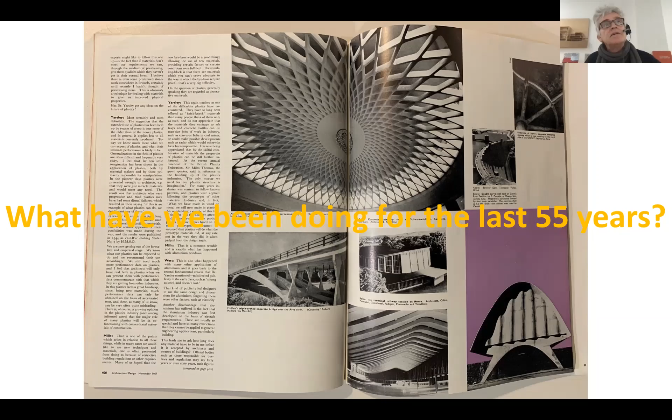But interestingly, I picked up a copy of an old architectural design magazine from a few years before then, and this had features on the construction of Corbusier's Unité d'Habitation in Berlin. It had really innovative examples of ferrocement concrete design. It had solar panels and solar shading devices, and adverts for laminated timber construction, including the crystalline hall as a government pavilion in an exhibition in Brussels. What have we been doing for the last 55 years?

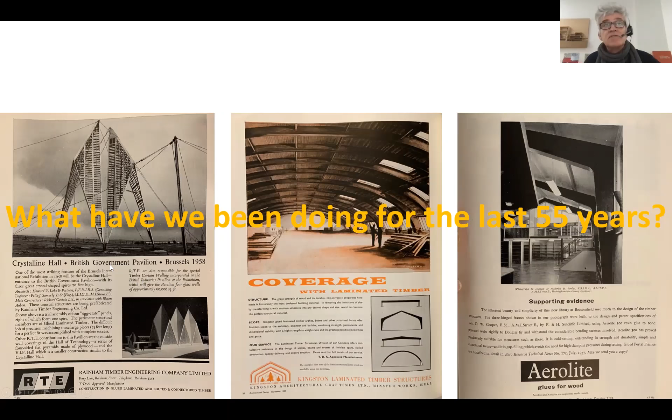Also an article in The Guardian which highlighted the issues around fossil fuel firms and their contribution to the problems of the climate emergency. It was in 1959 that a physicist first told the Petroleum Institute that a 10% increase in CO2 will be sufficient to melt the ice cap and submerge New York. I think this chemical contamination is more serious than most people tend to believe. Since then, there have been various alerts of the impacts on the climate.

In 1992, the Rio Earth Summit got some world agreement to what we had to do. 1998, unfortunately, the US refused to ratify the Kyoto Agreement. And even last year, members of OPEC were claiming that climate campaigners are the biggest threat to the industry, and claims that they're misleading the public with unscientific warnings about global warming.

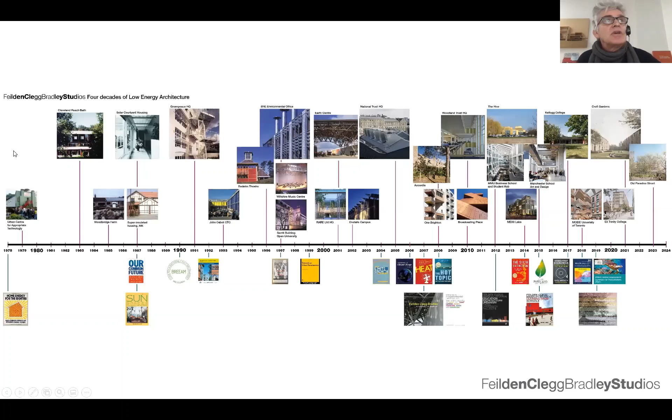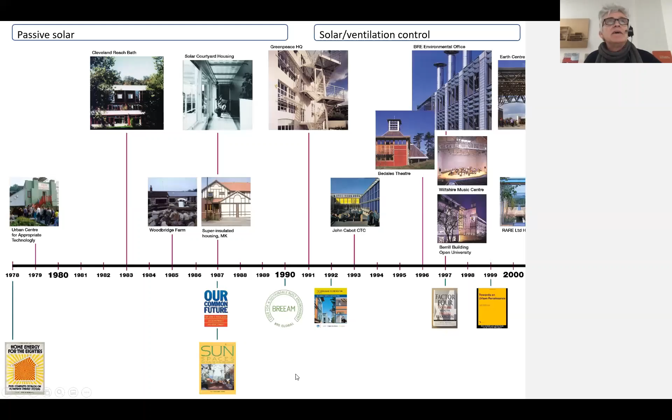Feilden Clegg Bradley Studios have been working for 40 years in the area of low energy architecture. So in '78, the firm started looking at passive solar design and community energy projects, developing significant improvements in how to work with the design team to reduce operational energy. And then after 2000, working holistically in housing, school design and workplace design to reduce energy consumption, and now looking at embodied carbon and passive house standards of design.

What has changed though in the 55 years is that the public now also realize there's a problem, not just individual scientists. And the UK Architects Declare, which has now got hundreds of signatures and also groups around the world, advocated 11 issues that architects should pursue in order to work towards this issue.

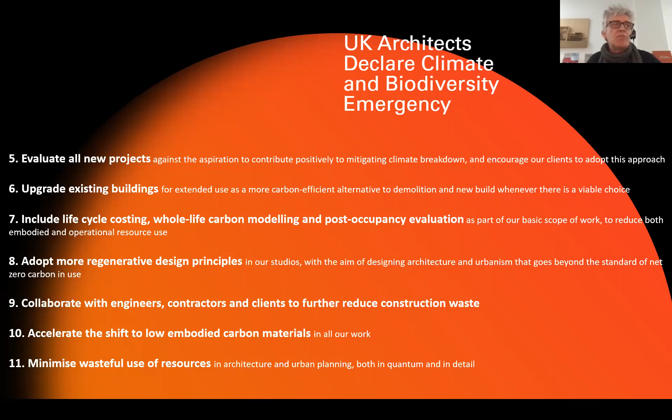Raising awareness, advocating faster change, establishing mitigation principles, sharing knowledge, evaluating all projects against issues, upgrading existing buildings, including life cycle costing, regenerative design, collaborating across the industry, accelerating the shift to low embodied carbon materials, and minimizing wasteful use of resources. And so I want to just cover 4 issues that I think architects need to address. We need to commit, we need to prepare, we have to act, and then we have to share.

Committing is the first thing. We need to recognize the issues and align our values and commit to act and understand and measure impacts. There's really useful work that's been done for more than a decade now on global footprinting. The world currently only has 1.7 global hectares per person on the planet. And different countries have different access to resources and also consume more than their country can supply.

So in the UK, we have a global footprint of 4.2 when the world can only support 1.7. In the UK, we only have 1.1 of resource in our country when we need 1.7. And overall, we're in the red category of needing almost 3 planets of resources to support our lifestyle. And energy, transport, food, goods, services, and infrastructure all contribute to this impact.

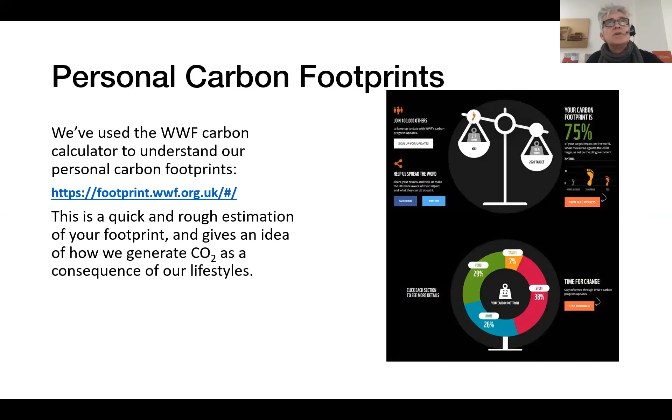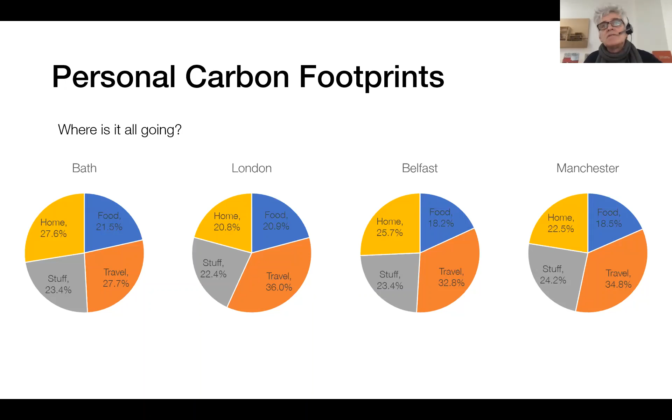So firstly, last year, we all looked at our own individual carbon footprints. The World Wide Fund for Nature has a good tool. And across all our offices, we worked out what our impacts were. We were trying to target 10.5, and we ranged between 10.8 and 13.4. It's split in quadrants, really, between food, travel, our stuff, and our home.

And we've also done this to look at the impact of our practice. And this last year, which is up to April this year, so this is before the pandemic, we are lower than we've ever been at 0.8 tons per person. Compared, you see, in 2006, when we were double that impact per person. So our office operations are getting better.

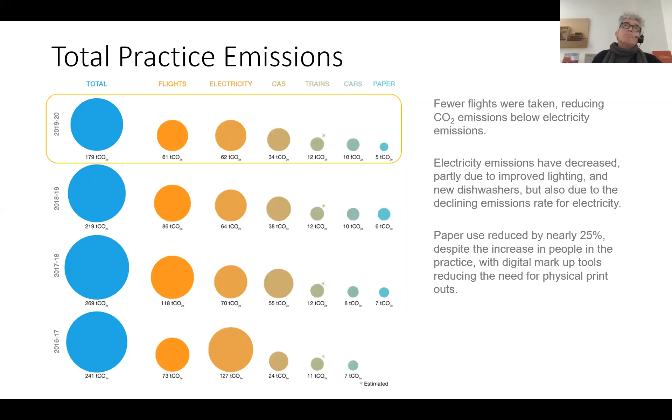We also looked at things like waste in our operations. We're not recycling what we should. And we looked at our food. We have a chef in each of our offices, and now we're going to vegetarian and vegan food, having significant benefits in our carbon impacts.

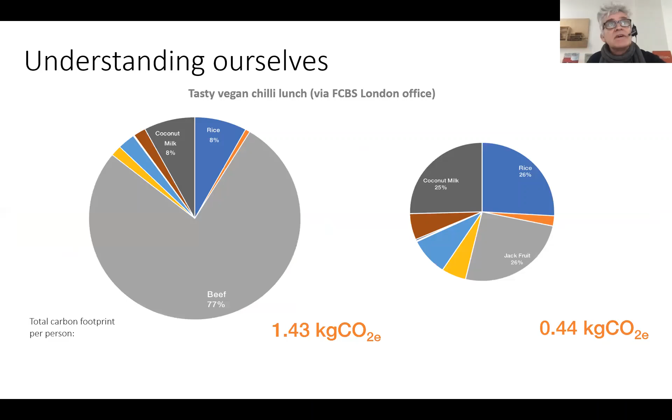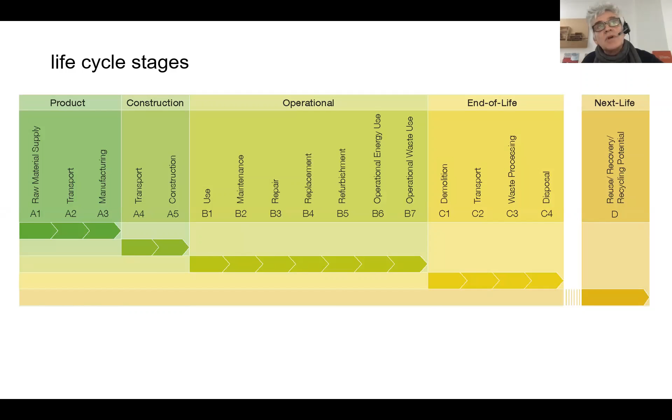So as we try and understand our impacts, we need to communicate this to our staff, we need to train, and we need to update our systems and our approach. So we've set out a 10-year plan, and most of this has to be done in the next 5 years if we're to try to get to net zero carbon in our projects by 2030.

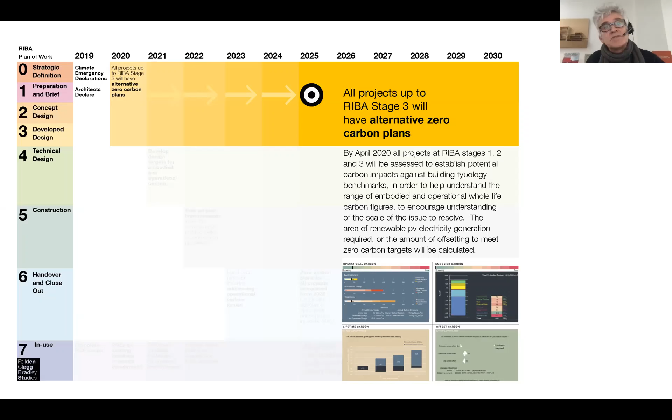First of all, we're setting up methods to understand what the carbon impacts are. We're working on One Planet Living action plans for each of our projects. And we're collecting information on how well our projects perform in use so that that can influence our benchmarking.

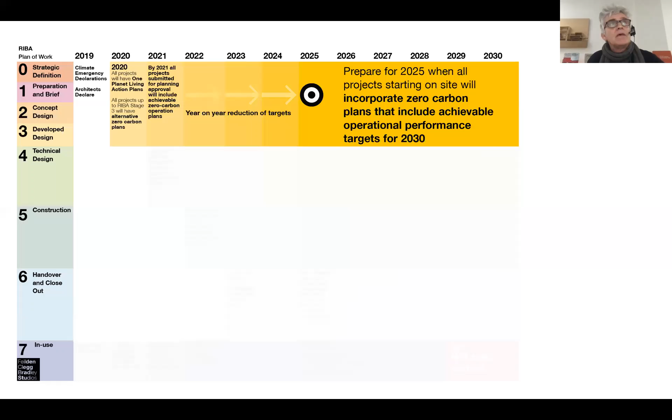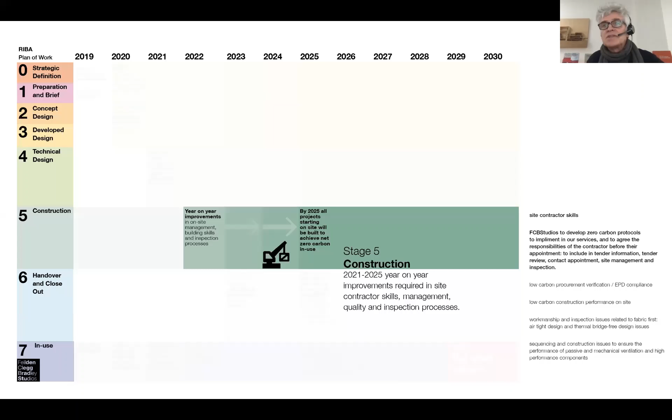We're then targeting year-on-year improvements, working out that by 2022, we have to detail and specify for net zero operational carbon, so that by 2025, all projects starting on site should be capable of operating at net zero. There's lots of skills that have to develop in the industry to achieve this. And after handover, we need to make sure that we help clients actually achieve this in operation through in-use monitoring and post-occupancy evaluation.

There are various tools and a lot of information now available on the web. There's a fantastic project called Project Drawdown, which I recommend you look at to try and see the scale of the benefits that could be possible if we fund them. And the UN Sustainable Development Goals and the 10 One Planet Living principles are really useful in helping frame the discussion with clients.

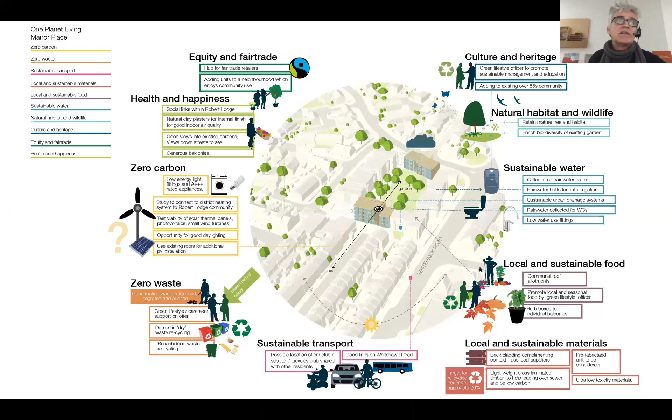Using the One Planet Living principles, we can help define at the early stages of a project which items we want to focus on and which might be achievable within the funding that is available. We set up understanding of our carbon impacts, both targets for operational carbon and targets for embodied carbon. And we use the information from the great guidance from LETI and soft landings protocols to guide how we act through the design stages and operation of our buildings.

And Ashley will cover some of these in his talk, but post-occupancy understanding is important, and the IEDE has done a lot of work in this. But we've got to realize how little time there is before 2030. So if we're briefing a project now, it might open in 2024. If we do a POE, we'll need at least 2 years to get information before we start the briefing of another job that would open in 2030. We're running out of time. We have to act immediately.

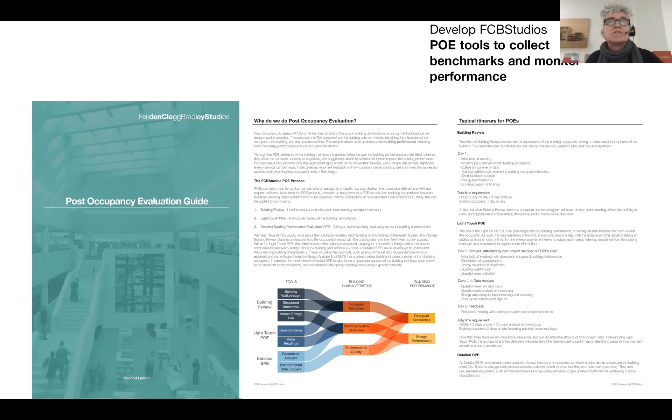So we've got protocols set up for how we should achieve this and different levels of feedback, which we discuss with clients. We then have to act. We have to communicate and agree with clients how we can work, define responsibilities, align the project team, and construct and monitor the projects. First of all, we should always look at renovation before new build.

For example, we've recently renovated the Hayward Gallery in central London and the Queen Elizabeth Hall. Alexandra Palace in London, another building that we've recently renovated. And in schools, looking at how existing buildings could be repurposed for schools, perhaps thinking about that before building new ones to reduce embodied carbon impacts.

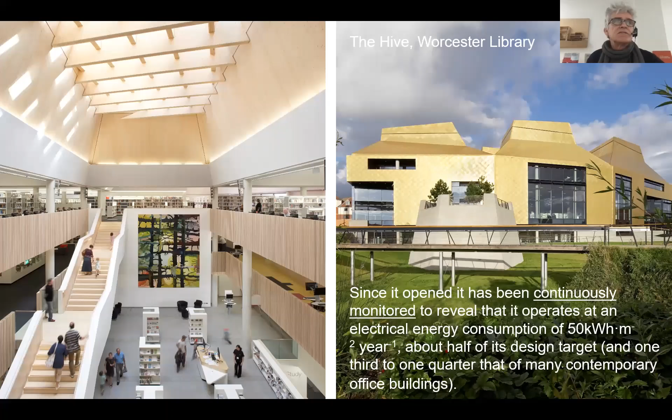And then in post-occupancy evaluation, as we have at the Hive in Worcester Library, monitoring it continuously and actually proving that you can have operation in use which is significantly better than the design targets set. By all this data collection, we then hope to be able to share this information and use it to help in design of future buildings.

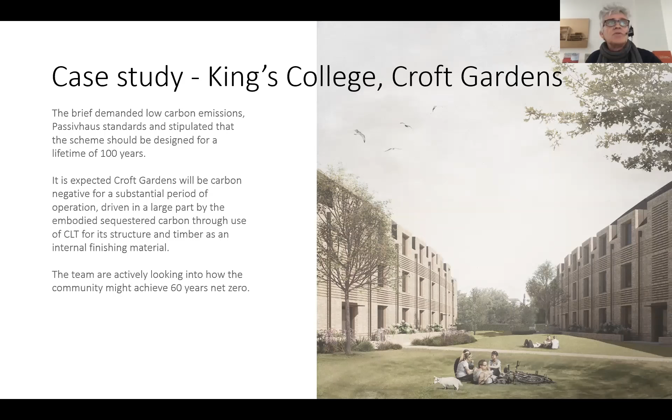One project we're working on at the moment for King's College in Cambridge is a brief that demanded low carbon emissions, passive house standards, and a scheme that could have a lifetime of 100 years. So we've looked firstly at the embodied carbon of the construction, and we're probably in the situation as the second of these graphs, where we start off with a carbon negative structure, but potentially over time, the operation will have carbon impacts.

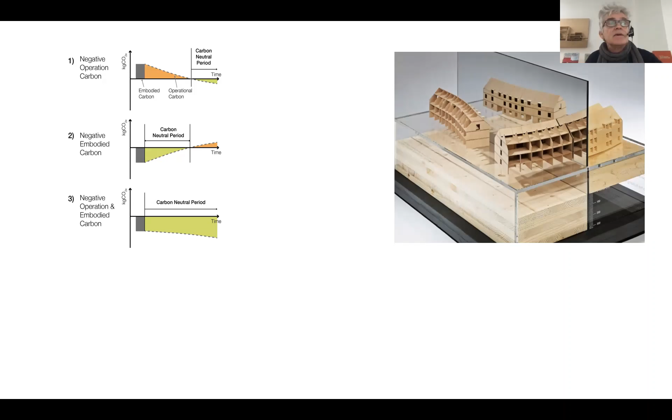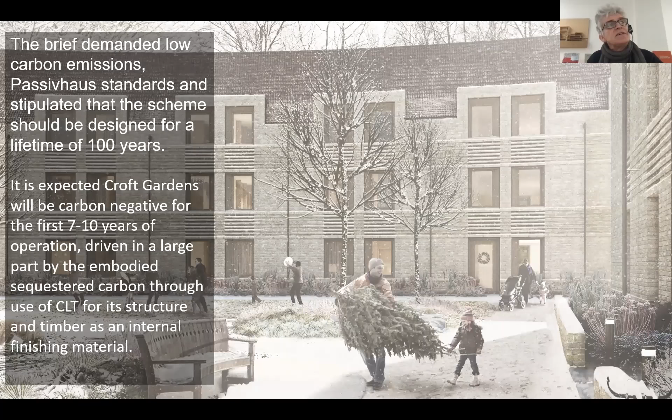But the ideal that we're looking for, and which may be possible, is to have a negative operational and embodied carbon throughout the lifetime of the building. So we're looking very closely at the airtightness, the specification of all the materials. And we're proving at the moment that for the first 10 years, we will be carbon negative. And through the later design stages and the use of more tools, including FCB carbon, we're looking to see if we can actually have a route to complete zero carbon in use of this building, operational and embodied.

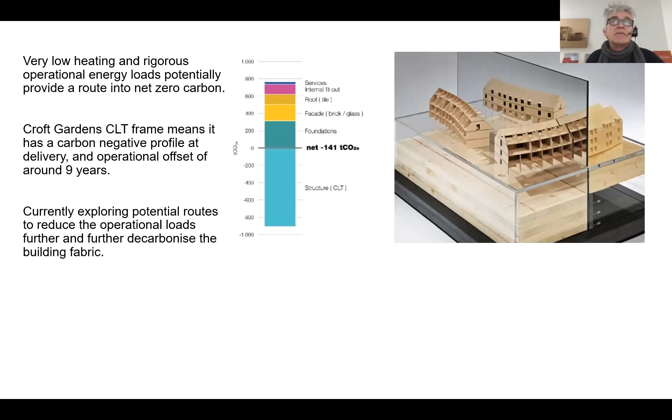We then need to share information. We need to share knowledge, celebrate success, and lobby for change. And this is why engagement with UCL and UCL's engagement with the industry is so important.

Our own publications are things that we've used to try and share our design approach. The book called The Environmental Handbook, which is now out of print. There is a website called The Environmental Handbook, and we've just recently got funding for a knowledge transfer partnership with UCL to try and do an update of this information. And we're running two PhDs, one on international climate design and one on climate emergency and university buildings.

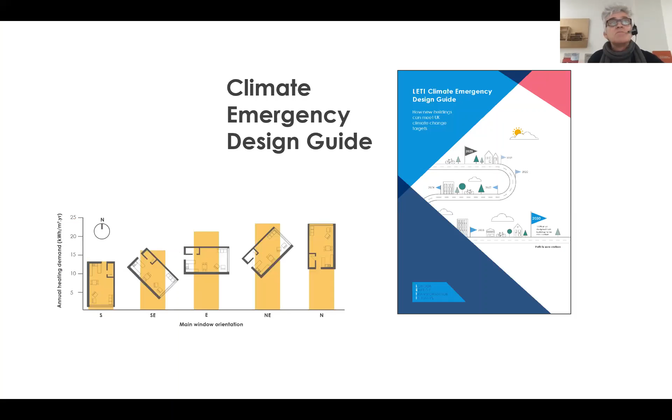Our involvement with the LETI design guide and the cross-industry collaboration is really important to set benchmarks and to lobby for change with government. Building less, building light, building wise, building low carbon, build for the future and build collaboratively being the underlying themes

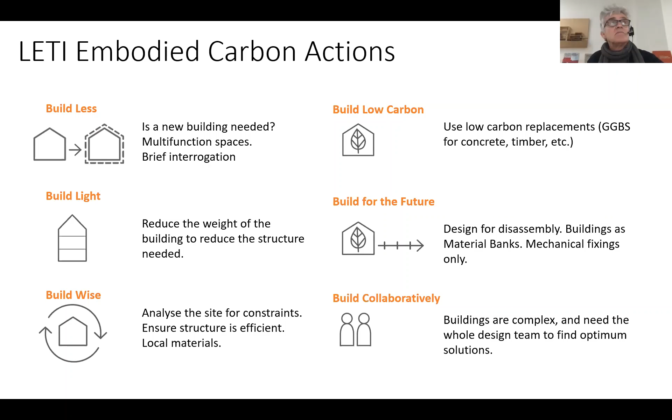of the LETI guidance. And we're involved in various projects with UCL looking at the performance of buildings, working with Joe Jack Williams, who did his PhD at UCL, who's now a researcher with us. Supporting research into school design, as was mentioned at the outset.

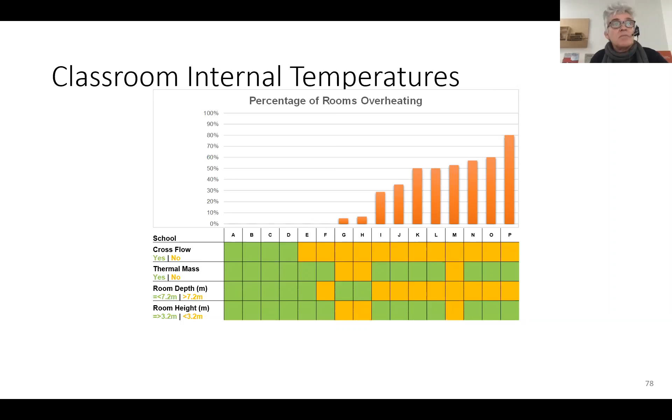This is recent work on overheating and design characteristics of schools, showing that schools A, B, C, and D in here had cross-flow ventilation, good use of thermal mass, restricted room depths, and optimized room heights, which actually were the defining characteristics of buildings which would be resilient to climate change. So simple design solutions.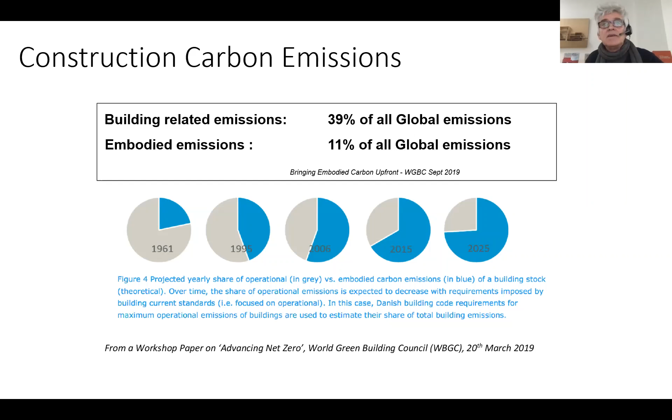The understanding of embodied carbon is now really increasing, and with the reductions in operational carbon impacts, embodied carbon is now becoming the big issue. So you can see here in the 2025 pie chart, over a 60-year life of a building, it's the embodied carbon that's now going to be significant. And it's the substructure and superstructure which have the big impacts. We believe that it's the early stage design period that can allow the biggest impacts to be made.

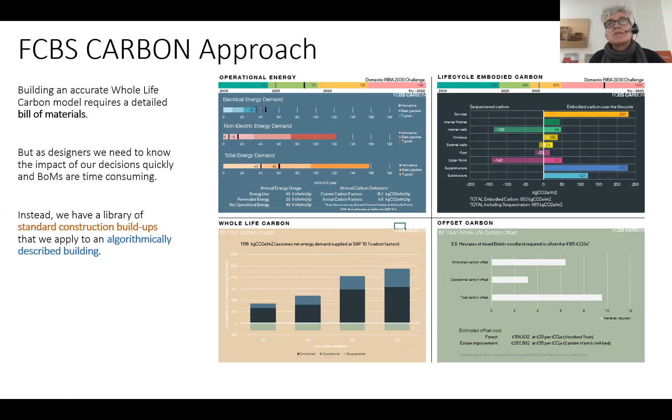And we've recently released FCBS Carbon, a tool which we've been developing over the last 18 months, to the industry. And we're developing this further in-house to help us look at early stage design to give clear indications of operational and embodied carbon impacts. And this is freely available. Within half an hour or an hour of use, you can have quite useful interactive information on the impacts of design decisions.

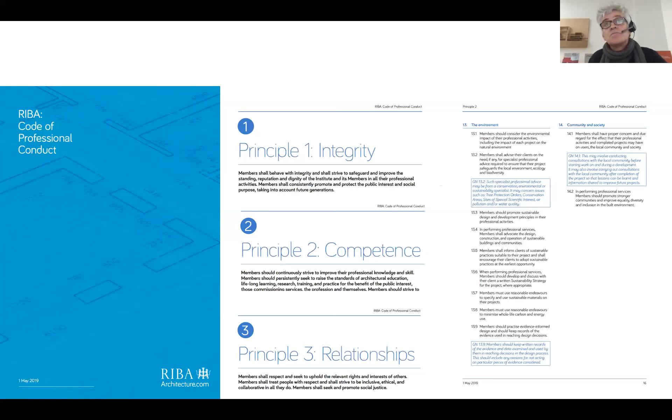So where does that leave us? Well, for architects, the Code of Conduct, which was reissued last year, does have quite clear steers that architects should be following. Within the principles of competence, there are competences on the environment, and all RIBA members should promote sustainable design and development principles. We should provide services.

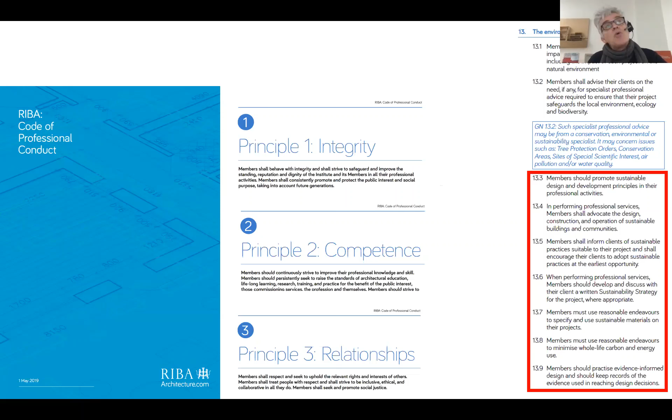We should inform clients of sustainable practices. We should develop and discuss written sustainability strategies and make reasonable endeavors to specify and use sustainable materials. We should use reasonable endeavors to minimize whole life carbon and energy use. So these are requirements of our professional institution.

Also, for community and society, there are requirements that we have due regard for the effect of our activities and completed projects, and the effects that they may have on users, the local community and society. And in performing our services, we should promote stronger communities and improve equality, diversity and inclusion in the built environment. These shouldn't be taken lightly, and all architects now are responsible for acting. And I don't know that we do it well enough.

Recently, for a Smart Practice conference, I was involved in this advice which is being published, which is a bit like those headings I've shown. So first, committing: aligning values, commit to action. Understand the impact: measure impacts of our own performance, and measure the impacts of our projects. Put our own house in order: communicate well, train, update our systems. Collaborate and educate, and that includes collaboration obviously with organizations like UCL. And close the loop: review, improve and monitor.